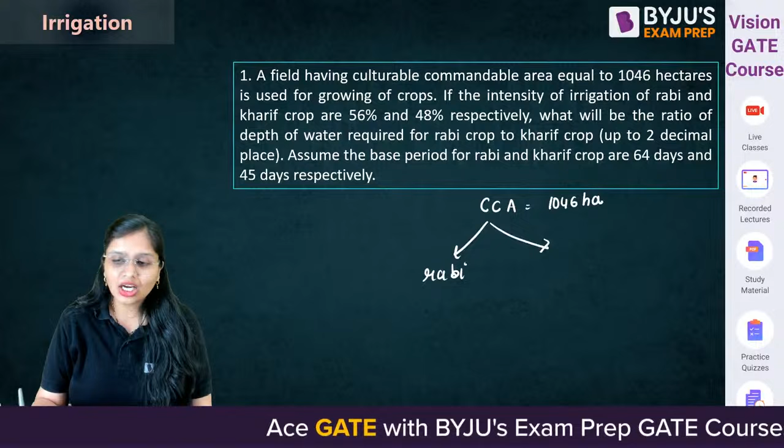A field having culturable command area equal to 1046 hectares is used for growing crops. If the intensity of irrigation for Rabi and Kharif crop is given, intensity for Rabi crop, like wheat, is 56%, and intensity for Kharif crop, like rice, is 48%. What will be the ratio of depth of water required for Rabi crop to that required for Kharif crop?

We already know delta equals 8.64 B by D. The 8.64 gets cancelled out, so basically it's the base period of Rabi crop and base period of Kharif crop, dividing by duty. But check it out, in the question duty is not mentioned. We know discharge equals area by duty, so from here duty will come out to area by discharge. So how will you calculate? First, let's calculate area.

Area for Rabi crop will be 0.56 into 1046, and area for Kharif will be 0.48 into 1046. How much does it come out to? This comes out to 585.76 hectares, and this comes out to 502.08 hectares. Okay, this is the area which is coming out.

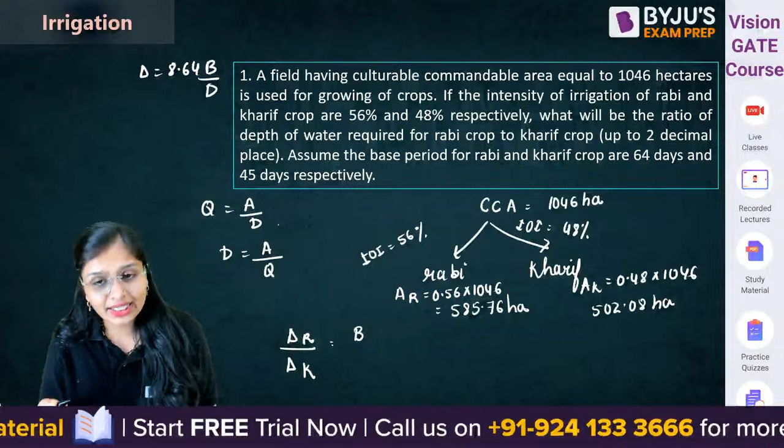Now, what I need to calculate is the ratio of depth of water, technically I need to calculate delta. So if I talk about delta, base period, have they told that the base period is different anywhere? Yes, base period for Rabi crop is given as 64 days, and base period for Kharif crop is given as 45 days. How will you do it?

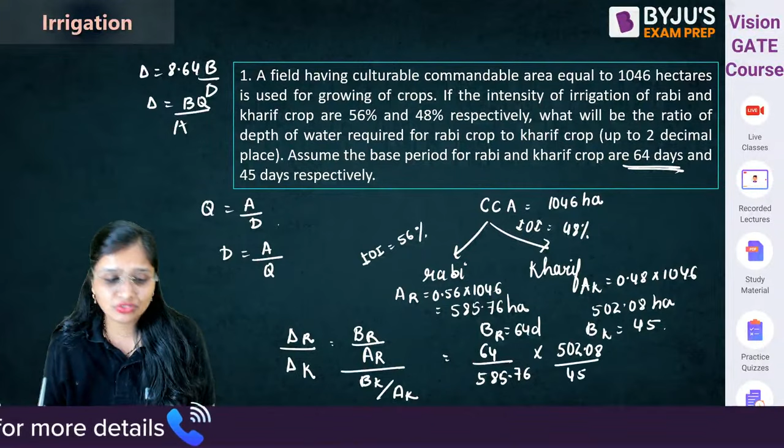Delta equals B into Q by A. Discharge is the same, so only base period of Rabi crop divided by area of Rabi crop, and base period of Kharif crop divided by area of Kharif crop. That's it, you will get the answer. Base period of Rabi crop is 64, area is 585.76. Area of Kharif is 502.08 and base period of Kharif is 45. Now guys, solve it, you will get the answer. Solve it quickly guys.

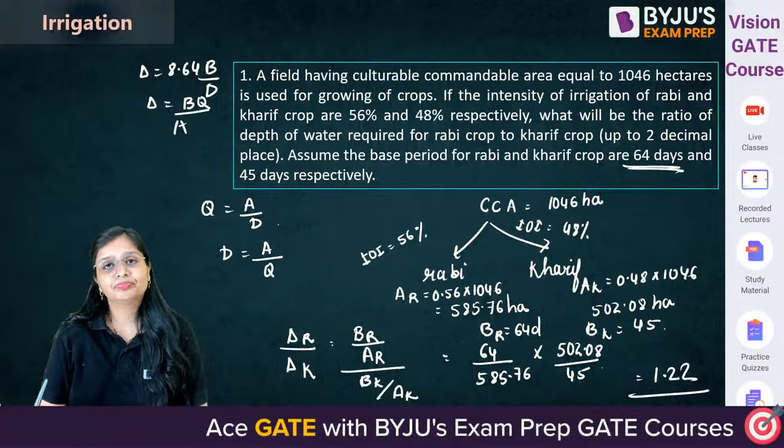Solve it quickly, you will get the answer as 1.22. Okay, so such pattern of questions can be asked in the examination.

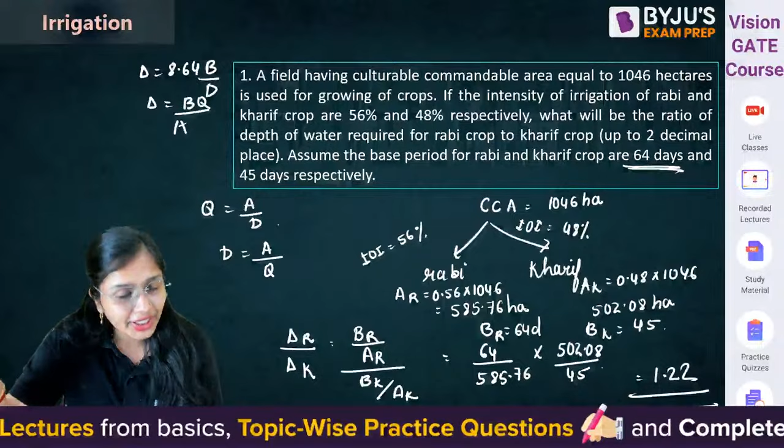See, in this the delta formula is used, intensity of irrigation formula is also used, discharge equals area by duty is also used. So in one question, all the concepts have been used.

Okay, now moving to the next question. This is a good question, simple, but I'll solve it. A distributary canal carrying discharge of 0.24 meter cube per second is used to irrigate 464 hectares of land for 8 hours. If the discharge reaching the field is 0.20 meter cube per second, and runoff losses is 375 meter cube, what is conveyance efficiency and what is application efficiency?

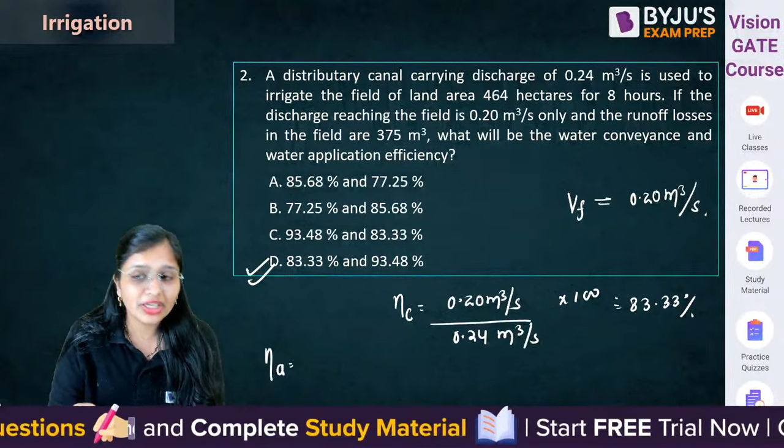According to the options you don't need to calculate the application efficiency, but still we'll calculate. Water application efficiency is water stored in the root zone of the crop divided by water delivered into the field. How much water is delivered into the field? 0.20 meter cube per second.

If 0.20 meter cube is going in one second, so in 8 hours how much will go? 8 hours, 1 hour is equal to 60 minutes into 60 seconds. So this will come out to be 5760 meter cube. This much amount of water will be applied to the field.

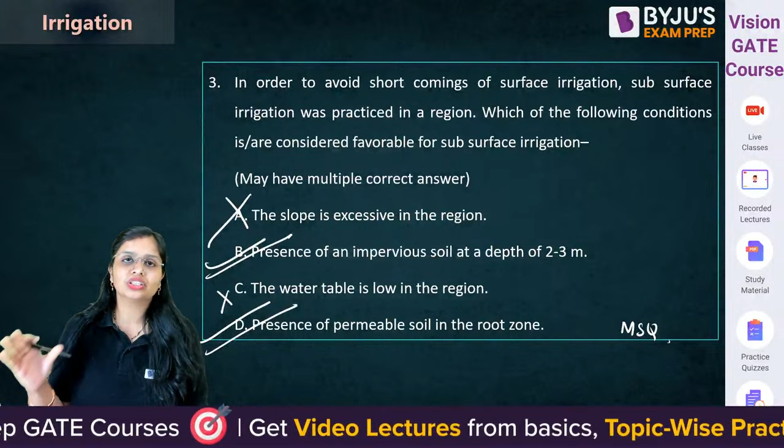Generally, maximum times in any GATE questions, ESE, state level, they ask about sprinkler irrigation. But till now they haven't asked for subsurface irrigation, that's why I have taken the question for subsurface irrigation.

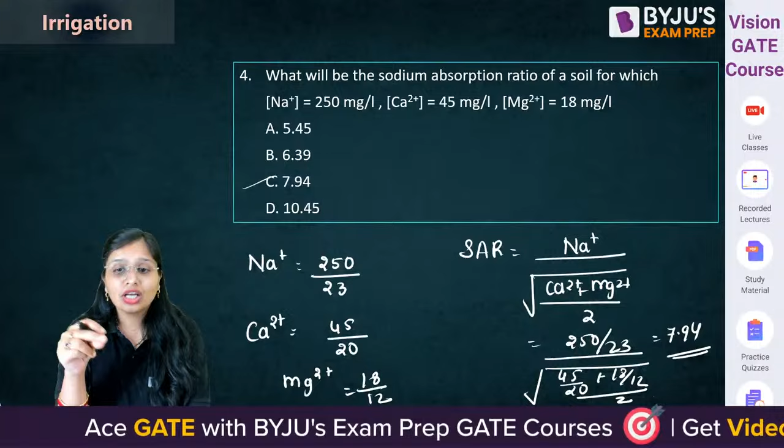In the question, if they want to trick it or make it even a 1 mark question, they will not give you the answer for sodium adsorption ratio. They will say low sodium water, medium sodium water, high sodium water, very high sodium water. So it's very important that you remember the range.

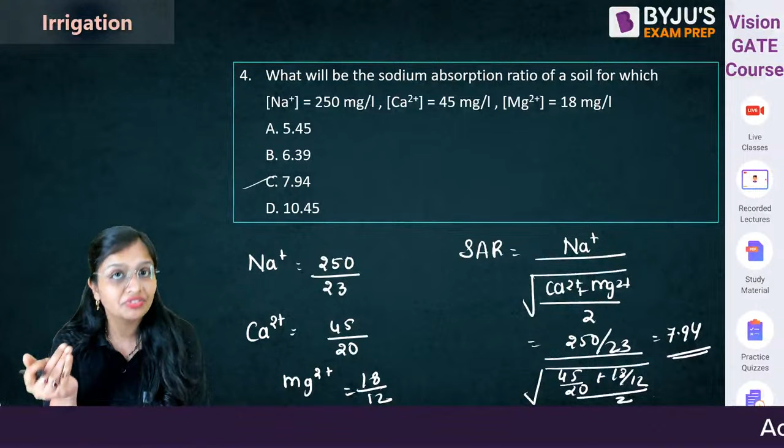A sandy loam whose water holding capacity is given. Area irrigated, depth of root zone, everything is given. It is asking for the frequency of irrigation and field irrigation requirement (FIR). This is an MCQ question for 2 marks. Whenever such questions come, guys, this is a good question.

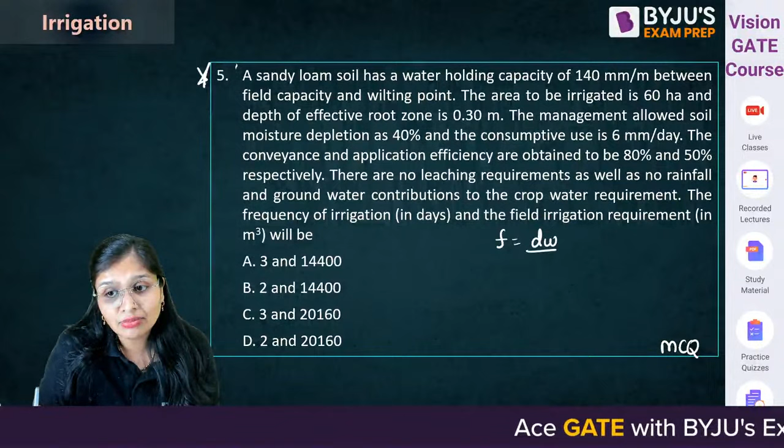Frequency of irrigation is DW by CU. Consumptive use is given in the question as 6 mm per day. Now how much water is stored in the root zone of the crop?

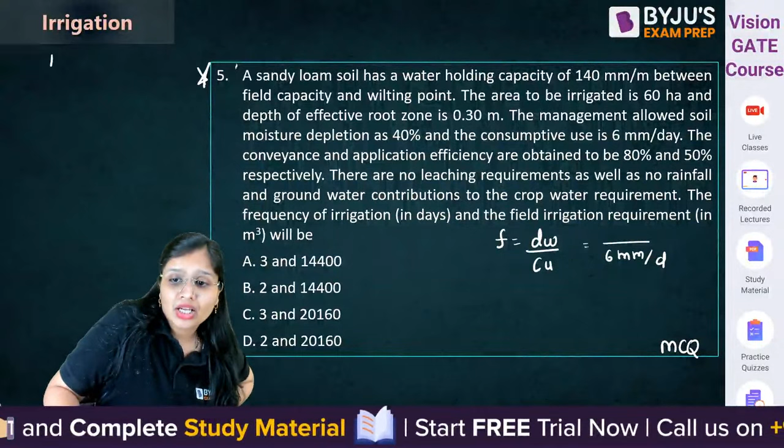Check it out. In 1 meter, 140 mm is stored. So how much is the depth of the root zone given? 0.3 meter. If in 1 meter 140 mm of water is stored, then how much will be stored in 0.3 meter? So 140 mm... for 0.3 meter how much will come out? This comes out to 42 mm of water stored.

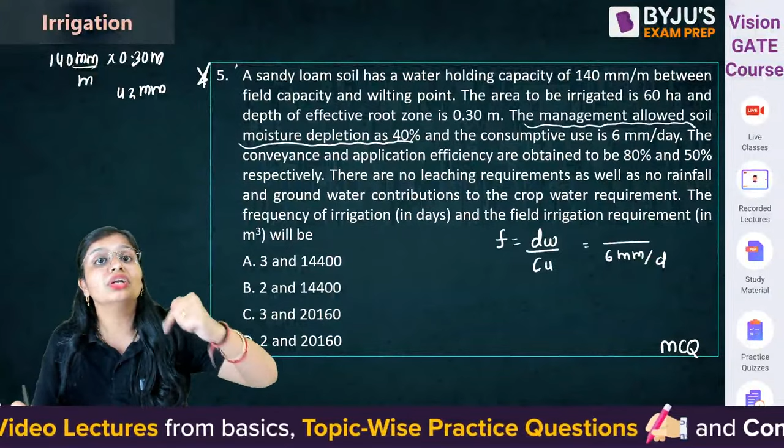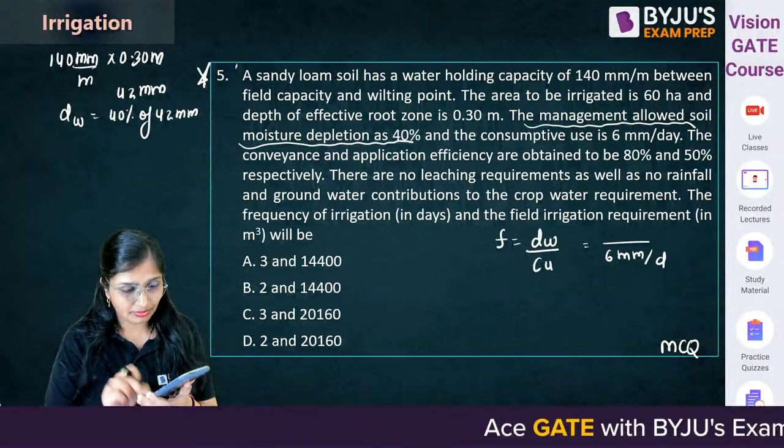So here your DW will become 40% of 42 mm. How much will come out, guys? 40% of 42 mm - solve it. This comes to 16.8 mm. So from here, 16.8 mm - now calculate it. 16.8 divided by 6, this will come to 2.8 days.

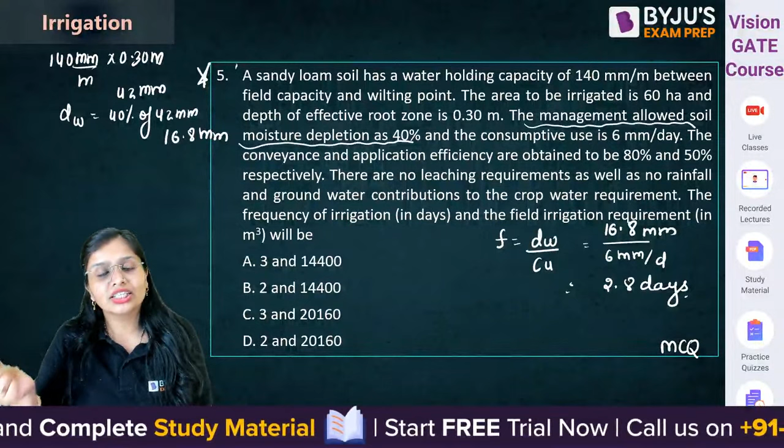Frequency of irrigation will be rounded off to the lower side, because if you take 2.8 as 3, there are chances it will reach the permanent wilting point. So either B or D will be correct. Now we have to calculate field irrigation requirement.

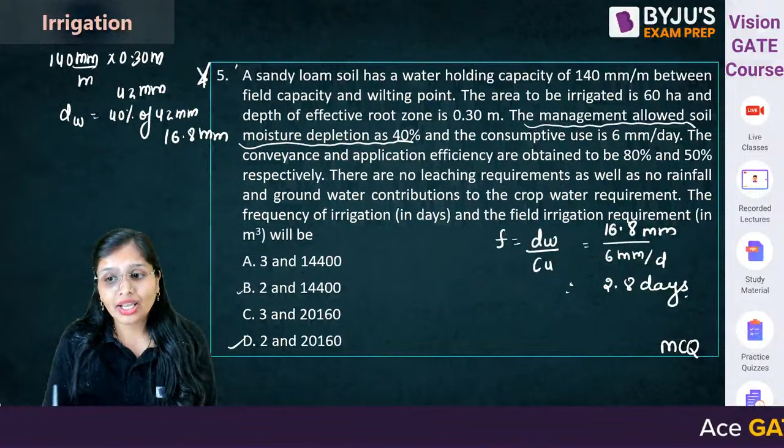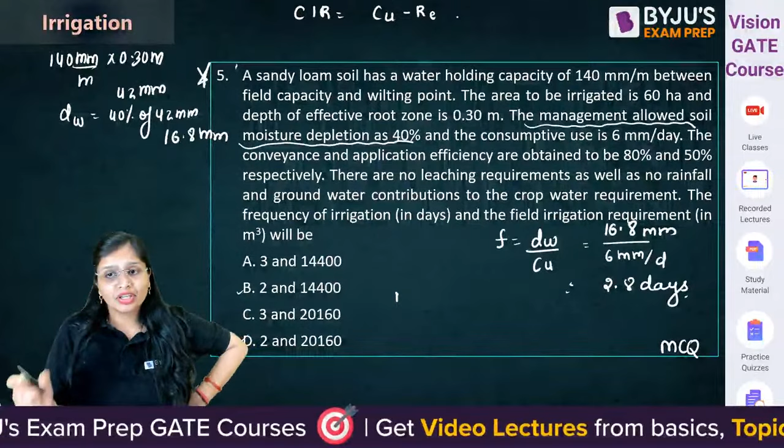For calculating field irrigation requirement, what do we need to know, guys? Field irrigation requirement - keep in mind, consumptive irrigation requirement is CU minus RE. Consumptive use is given in the question. Net irrigation requirement is consumptive irrigation requirement plus pre-sowing requirement plus leaching requirement. Nothing is given in the question, leaching requirement is nothing given. Field irrigation requirement is net irrigation requirement divided by water application efficiency.

Now check it out. After every 2 days you need to water it. How much amount do you need to water it, guys? If for 1 day evaporation and transpiration require 6 mm of water, then in 2 days how much will they require? 6 mm they require for 1 day, so for 2 days how much water will be required? 12 mm. In the question it has asked us in terms of volume.

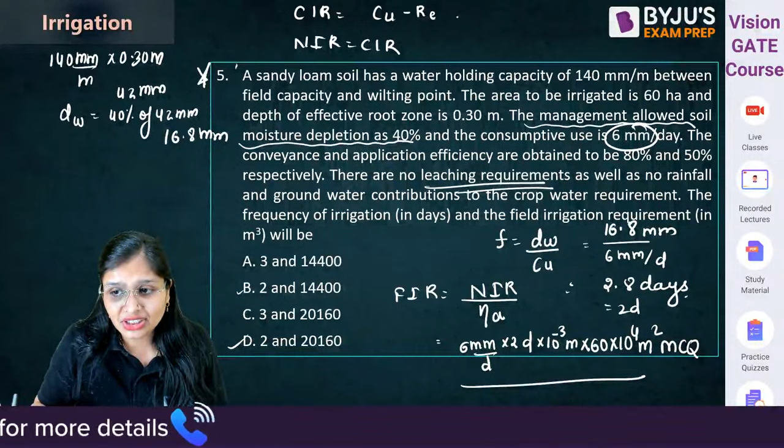So first convert mm into meter, 10 raised to power minus 3. Now multiply by area, 60 into 10 raised to power 4. Divide by water application efficiency, which is 50%. Solve it, you'll get the answer. How much are you getting? The question has asked for field irrigation requirement.

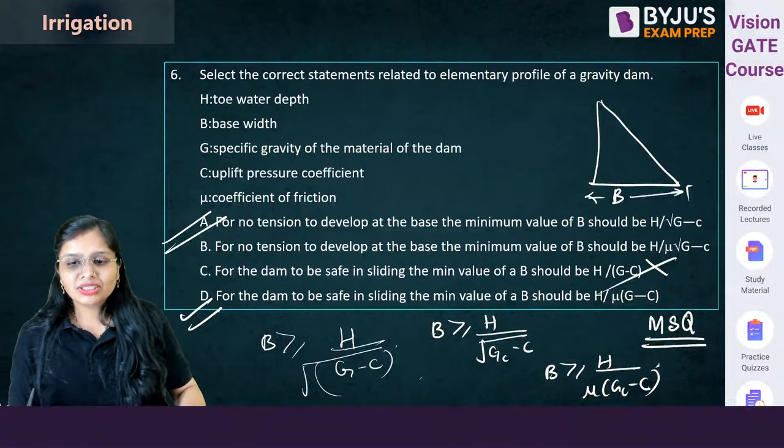Very very very simple question, guys. Sometimes you can't expect that simple questions will come, but they do come. The net uplift force on dam if height of water in the reservoir is 45 meter. Let us suppose the height of water in the reservoir is 45 meter and width of the dam is 21 meter.

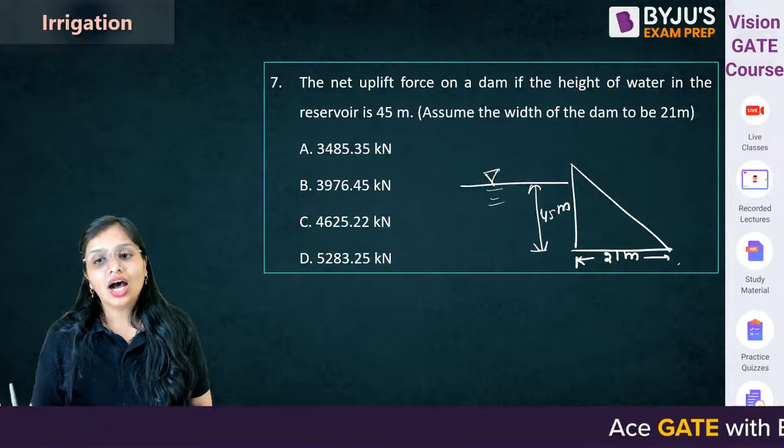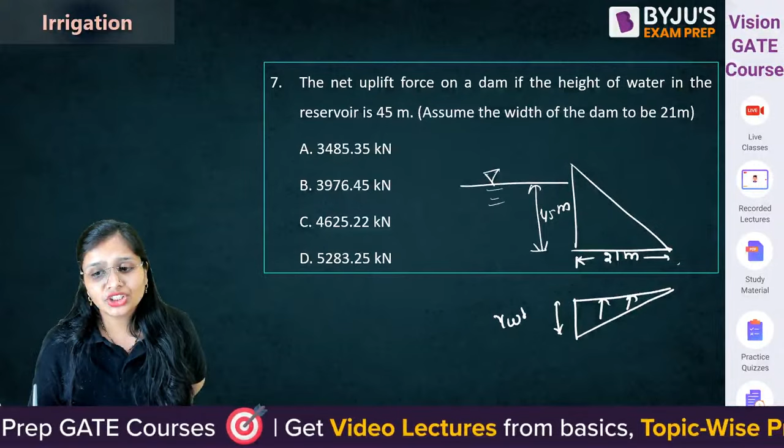So what will be the uplift force? Just calculate the area of this triangle. Here it becomes equal to gamma WH, so half base 21. This will be gamma W.

Let's take it as 9.81. Height will be 45, that's it. So from here you will get 4625.22 kilonewton. Such simple questions can also be asked.

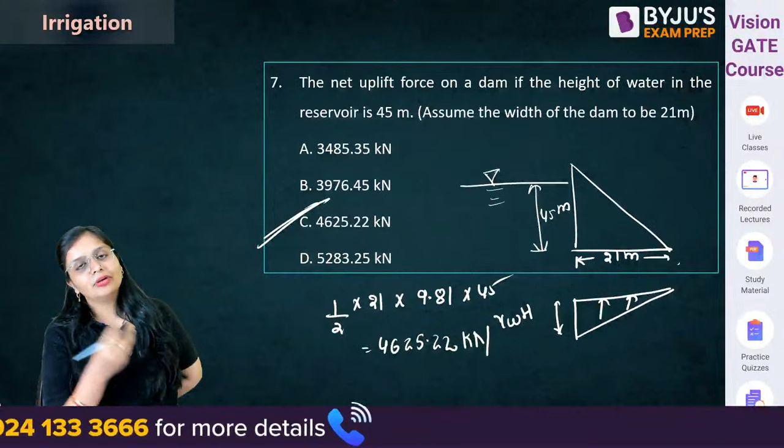Whenever you have the habit of solving tough questions, they can ask simple questions as well. Good question, this is an MCQ for 2 marks, because if they would have given only the options, it would have been 1 marks. But classification of the dam is also asked.

A concrete dam is there whose width is 14 meter, height is given to you as 17.45 meter. Now this dam you have constructed on a river. You have constructed this dam on a river to store water. Compressive strength is given, specific gravity is given to you.

What will be the critical height of the dam? Come on guys, there is a formula. Critical height, or you call it by one more name, limiting height of the dam. Formula is F upon gamma W, G minus C plus 1. This is the formula.

Compressive strength they have given to you as 2896. Gamma W we will take as 9.81. Specific gravity they have given us as 2.24. Uplift we are assuming full reservoir level, so 0, it will be 0 plus 1. Solve it, you will get the limiting height of the dam, or you call it critical height.

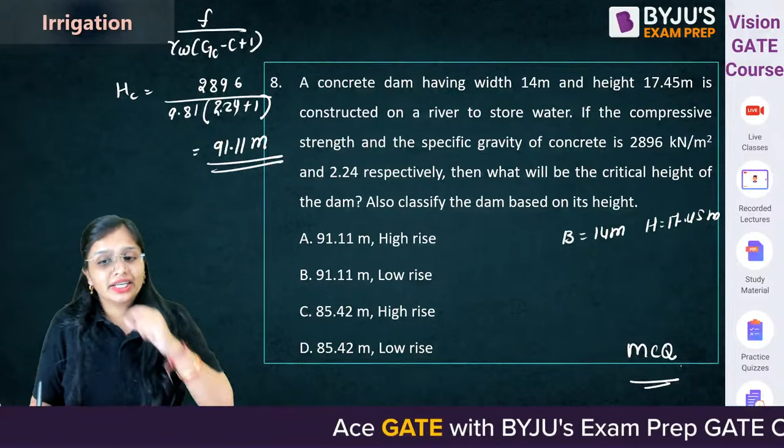How much will it come, guys? What will the critical height be? When you solve it, it will come 91.11 meter. This will be the critical height. Now A can also be the answer, B can also be the answer. How could you know which one is correct?

The given height is 17.45 and the critical height which you are getting is 91.11 meter. So is the height you are getting really 91? Just check it out once. 91.11 meter is coming.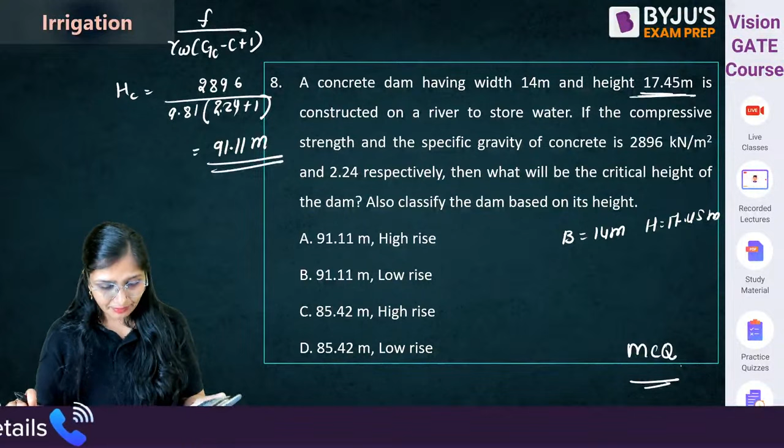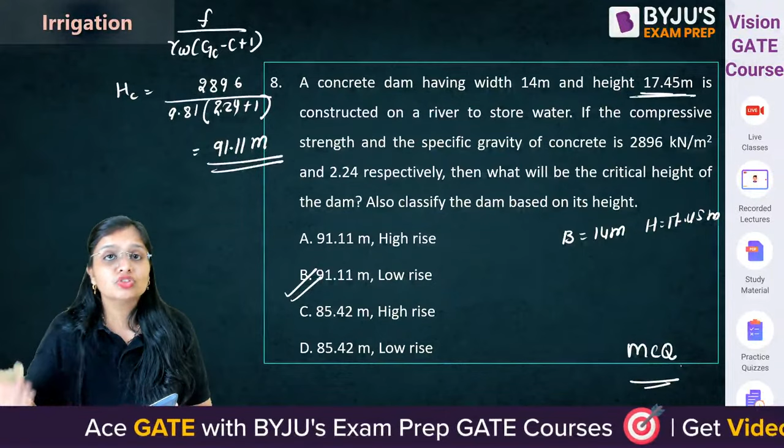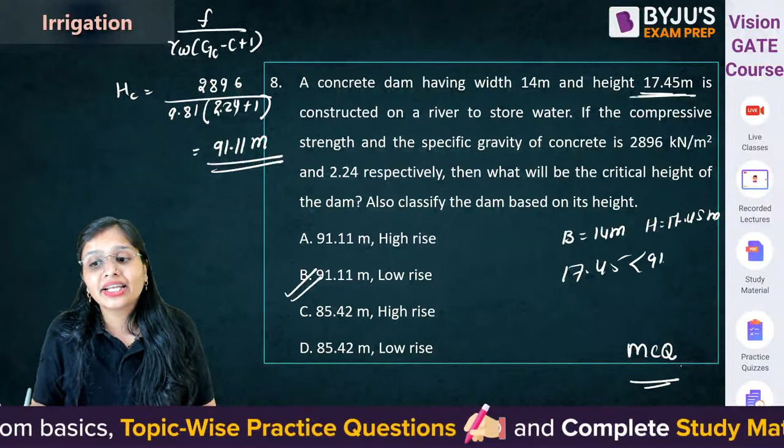So the height you are getting of the dam is less than the critical height, so you will call it low rise. If it were the opposite, suppose the height were 100 meter, then if the given height comes out to be more than critical height, it will be high rise. But since now the given height 17.45 meter is less than critical, you will call it low rise.

Next, a channel is designed by Lacey's theory. Velocity is given to you as 1 meter per second and silt factor is 1. Now you have to tell the hydraulic mean radius. It's very simple, directly use the formula. Use it, this is also 1, this is also 1, you will get 2.5 meter. Simple.

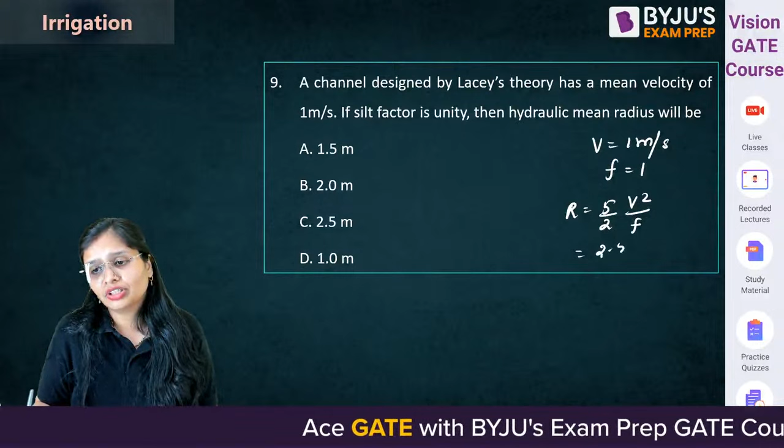1 marks. A wide unlined channel carrying silt-free water, no silt is there, has a depth of 2.5 meter. The slope is given to you as 1 in 10,000. The maximum permissible stress on the bed to prevent scour.

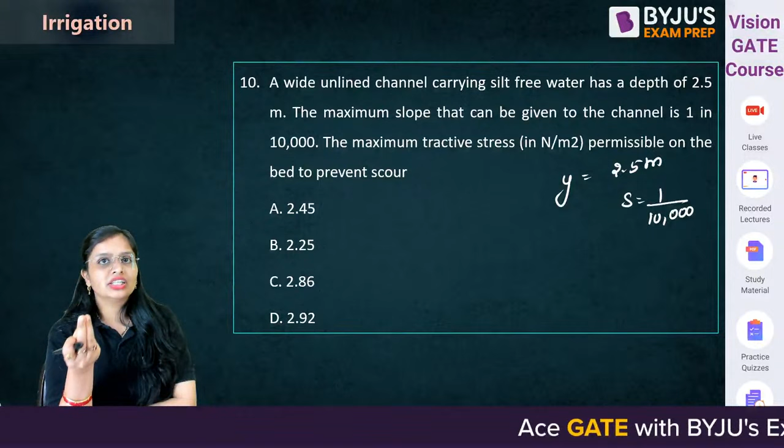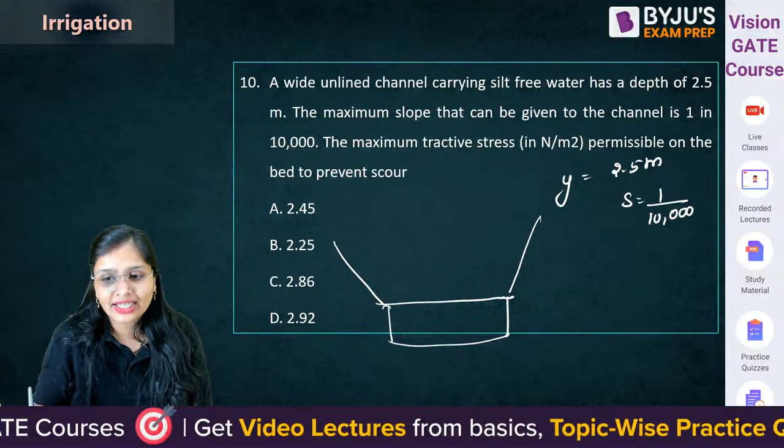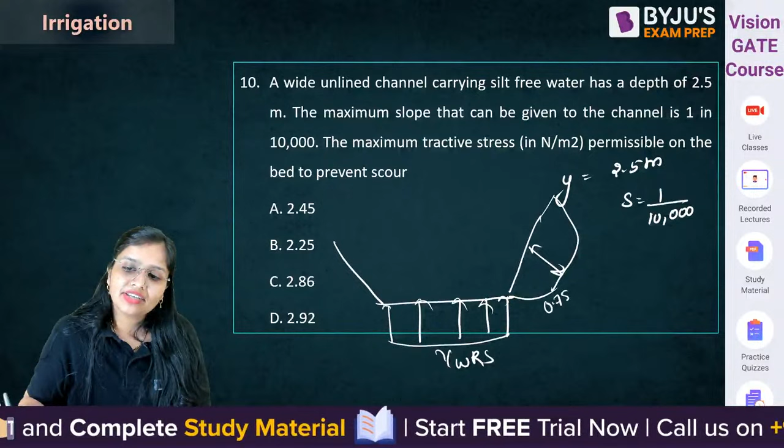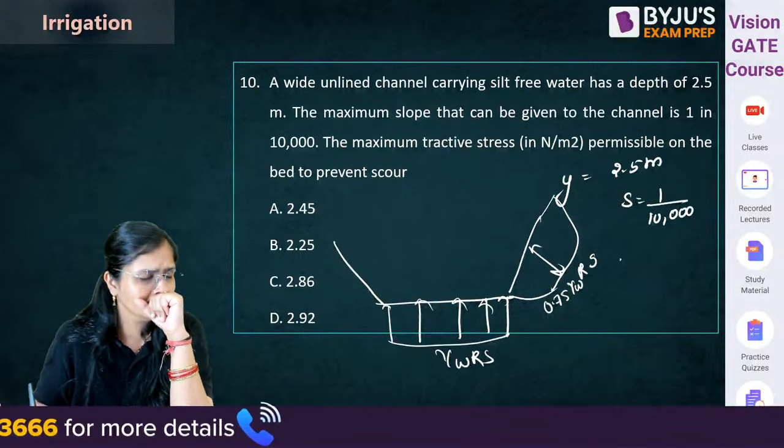In this question, generally they should specify whether it is a rectangular channel or a trapezoidal channel. However, for wide rectangular channel or for trapezoidal channel, in both cases, for the bed, the tractive stress is gamma WRS. Like if it is a trapezoidal channel also, for the sides in the trapezoidal channel it is 0.75 gamma WRS. It has asked for the bed. However, it should specify whether it is a very wide rectangular channel or trapezoidal channel. For that condition only gamma WRS is valid.

Gamma WRS, I'm taking it as a very wide rectangular channel, benefit of doubt. Gamma W is 9.81. R for very wide rectangular channel is equal to what?

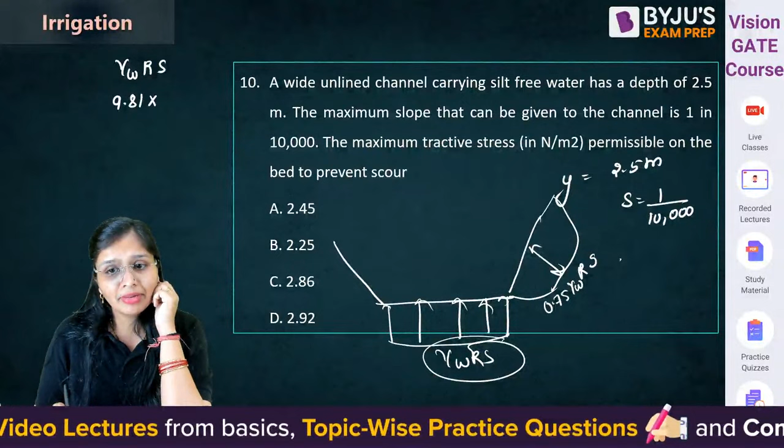Y by 2 - I could have taken that. Is it? For a rectangular channel, if it were efficient, then it would be y by 2.

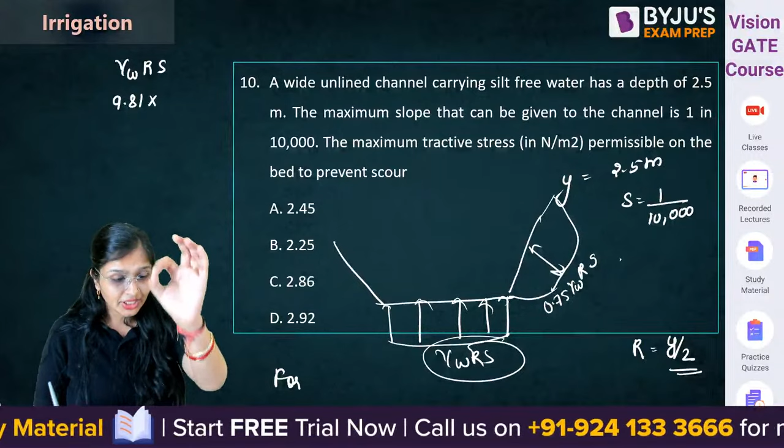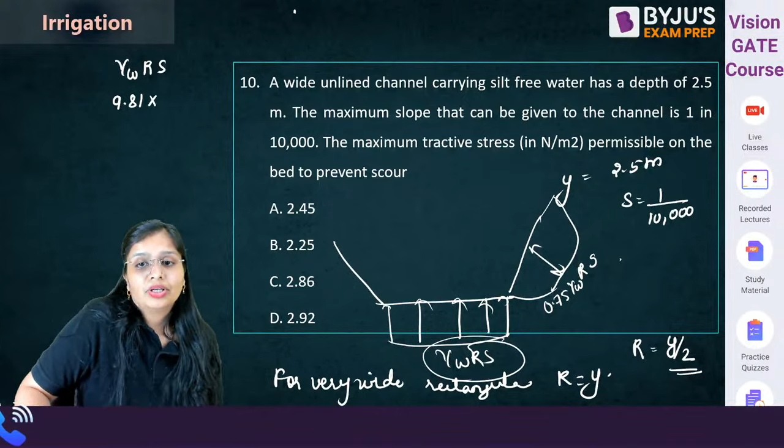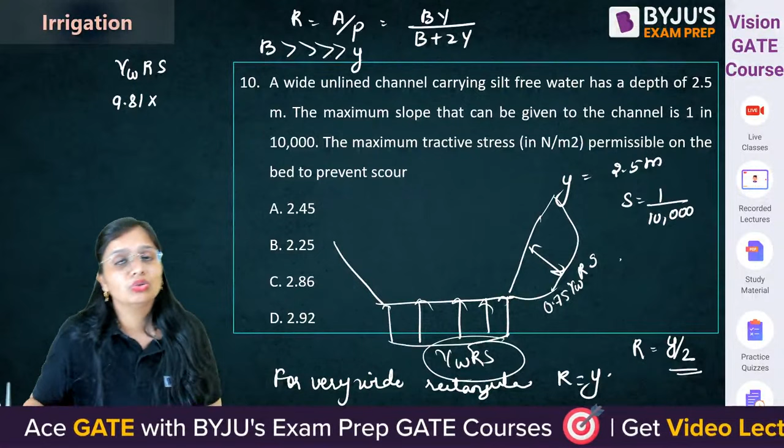But for a very wide rectangular channel, here students make a mistake. For a very wide rectangular channel, keep in mind, R is equal to y. Why? Because hydraulic radius is wetted area by wetted perimeter. Area is b times y, perimeter is b plus 2y. Since width is multiple times more as compared to the depth of flow, you take this approximately as width only. So this will be y.

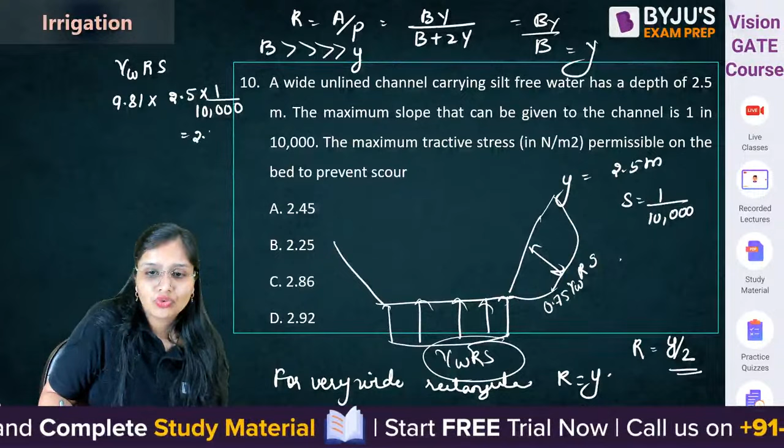Depth is given as 2.5 and slope is 1 by 10,000. How much will it come? It will come to 2.45 Newton per meter square.

Answer. Okay, next question. So you have been given a permeable foundation and asked to calculate exit gradient. Very simple: H by D into 1 upon pi root lambda.

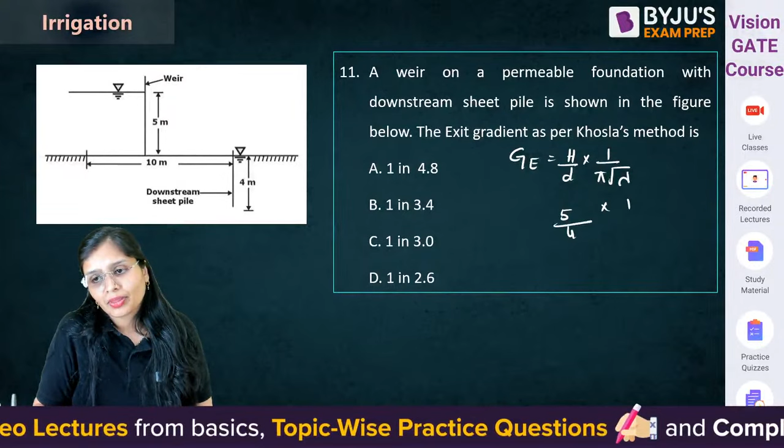H is how much? H is 5 meter height. Depth of downstream pile is how much? 4. We must calculate lambda. Lambda is 1 plus root over 1 plus alpha square, by 2.

Alpha is B by D. Width is 10 meter, and depth of the downstream pile is 4. So 10 by 4 is 2.5, right? 2.5. So 1 plus root over 1 plus 2.5 square, by 2. How much will it come?

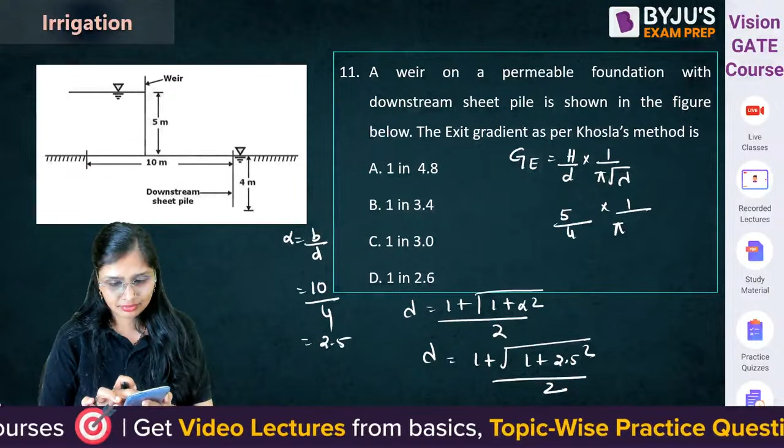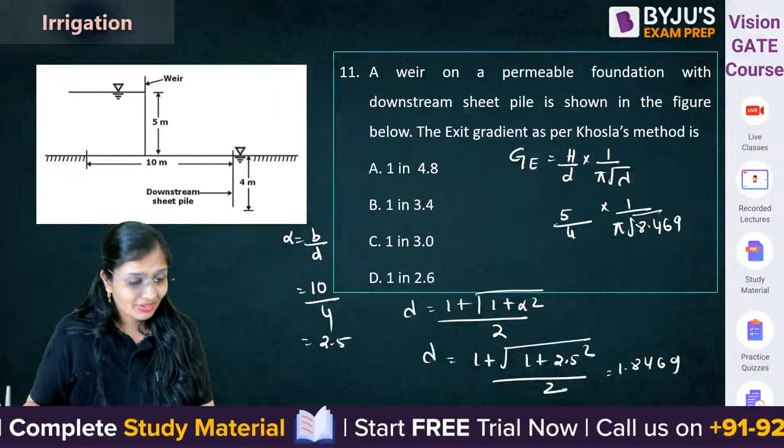This will come out to be 1.8469. Substitute it, that's it. But one thing you have to do - when you solve this, you will get it as 0.29.

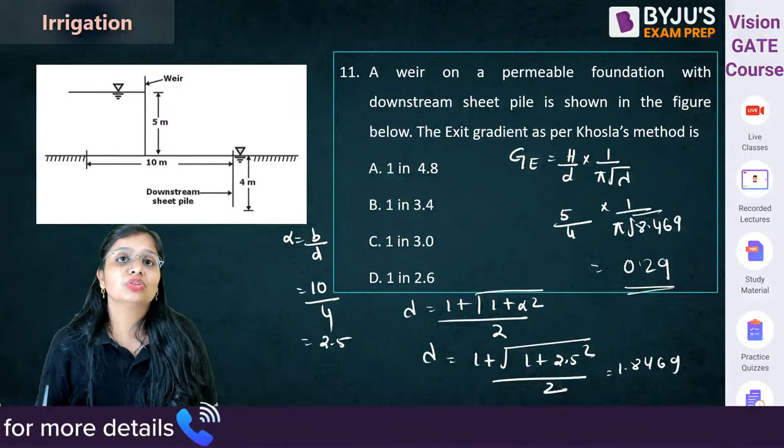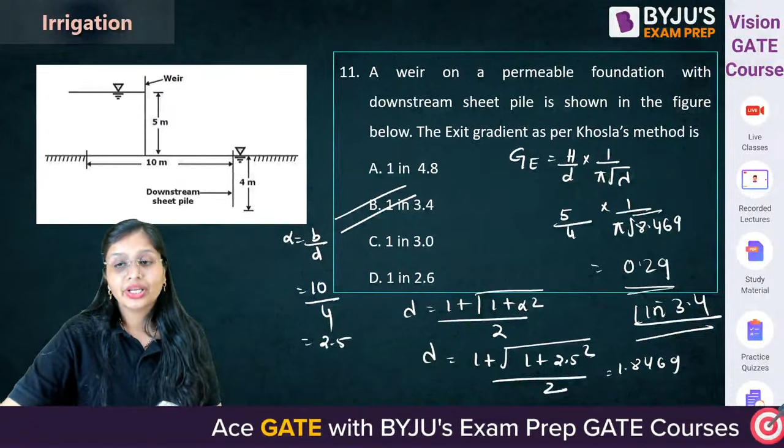So you have to inverse it, because the question hasn't asked directly in terms of decimals - they have asked in terms of slope, 1 in something. So when you inverse it, you will get 1 in 3.4. The inverse button you have in your calculator - do it, 1 in 3.4. If you ask how to do it on a virtual calculator, just do 1 upon 0.29.

So this is again a good question. A loam soil is there whose field capacity is given as 30%. Permanent wilting point is given as 15%. Gamma D is given as 1.5 gram per cc.

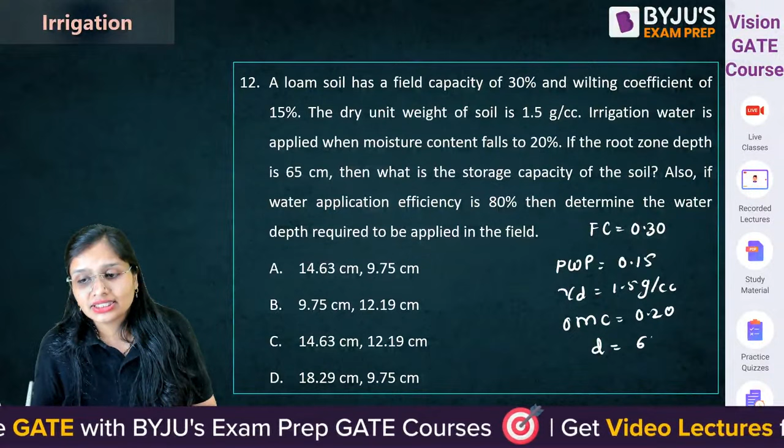And irrigation water is applied when moisture content falls below - nothing specific is given, that means optimum moisture content is 20%. Okay? If the root zone depth is 65 centimeter, what is the storage capacity of soil?

Technically, it is asking you how much water is stored in the root zone of the crop - means it's asking you for DW. Okay, so first calculate DW. DW will be gamma D into D, by gamma W, into field capacity minus optimum moisture content.

Gamma D is 1.5, gamma W will be 1. D will be 65 centimeter, into 0.30 minus 0.20. How much will it come? 1.5 - guys, you also solved it, you're just waiting for me only to solve every question. It comes to 9.75 centimeter. This is the storage capacity of the soil.

Okay, now according to us, B will be the answer. Now check it out, one more thing they're asking: determine the water required in the field. See, 9.75 centimeter is the water that will be stored in the root zone.

But we need to apply more amount of water. Why? Because when you supply water to the field, run off losses will happen. So if you supply 9.75, that 9.75 will not be stored in the root zone - it will not be stored in the root zone, because losses like runoff will be there. So you need to supply more amount of water.

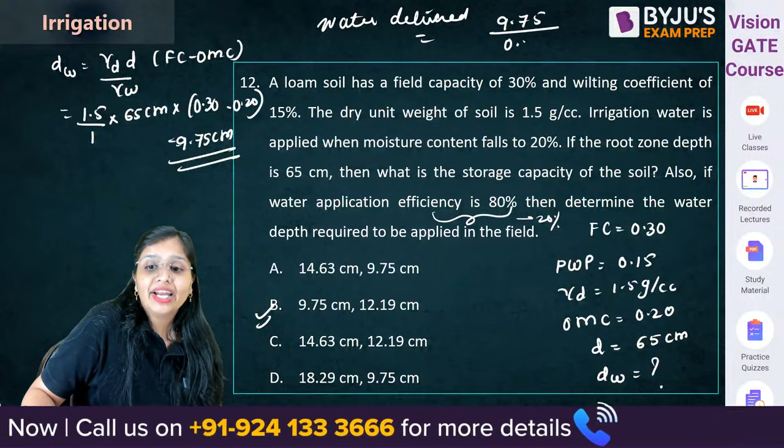How much more? Because check it out, application efficiency is 80%, so 20% loss has happened. That means you have to supply more than 9.75. So the water to be delivered into the field, or water applied in the field, will be 9.75 divided by 0.80, which comes out to be 12.19 centimeter. Okay, so B will be the correct answer.

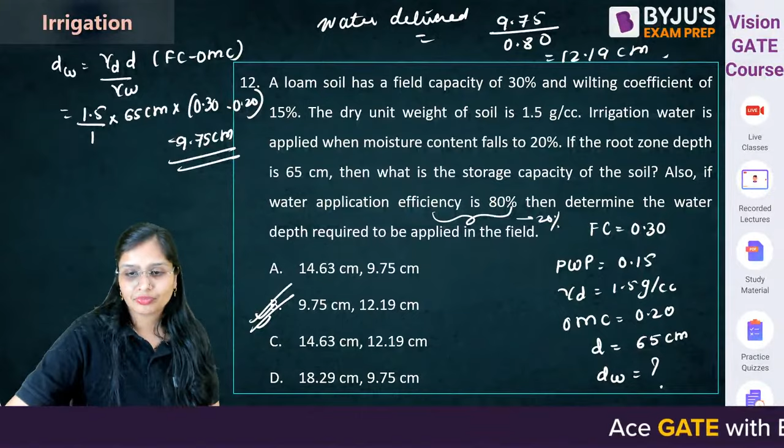Fine, so now this question - simple, only you should know one thing for this question. A canal irrigates a culturable command area, sugarcane is there and wheat is there. This can be asked for 1 mark - okay so I have taken 1 mark, 2 marks, MCQs, NAT, MSQ.

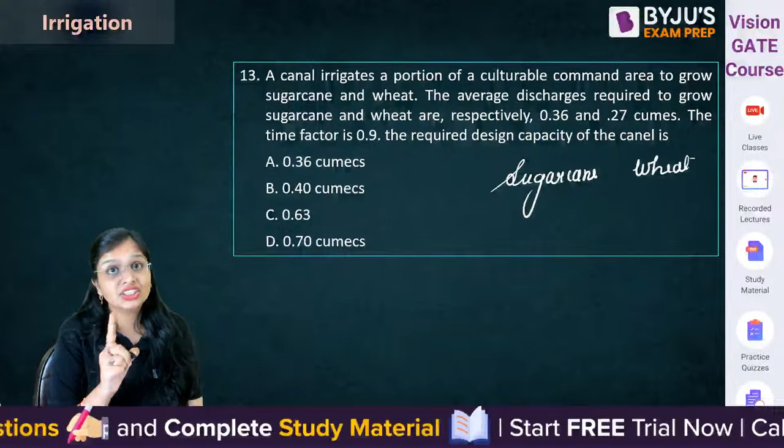Sugarcane, wheat is there, discharge is given to you. Average discharge is given in the question, keep that in mind. Average discharge is 0.36 cumec for sugarcane and for wheat it is 0.27 cumec. Time factor is given to you.

It is asking you design capacity. Sugarcane is a perennial crop, wheat is a rabi crop, so we need to add both of them - that is 0.36 plus 0.27. This is the average discharge.

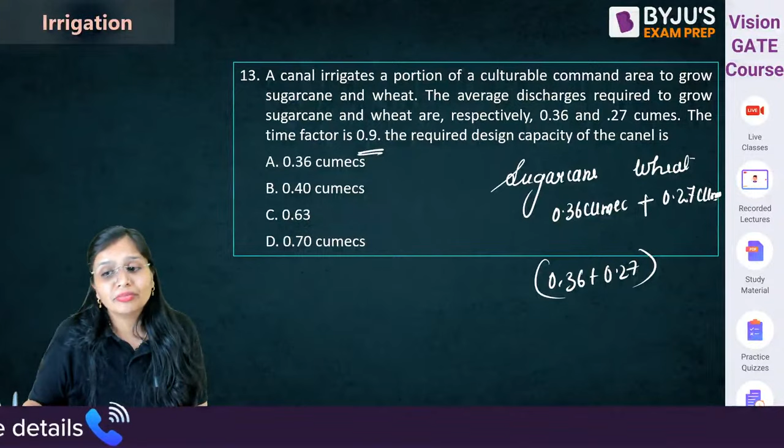Time factor is number of days canal actually runs divided by the number of days of irrigation period. If a crop takes 4 months, we don't run the canal for 4 months - we don't run it for 120 days, we run it for 80 days, 50 days. So technically, if we run the canal for fewer days, we need to supply more amount of water - so more water means you have to divide by 0.9. How much will it come when you solve it?

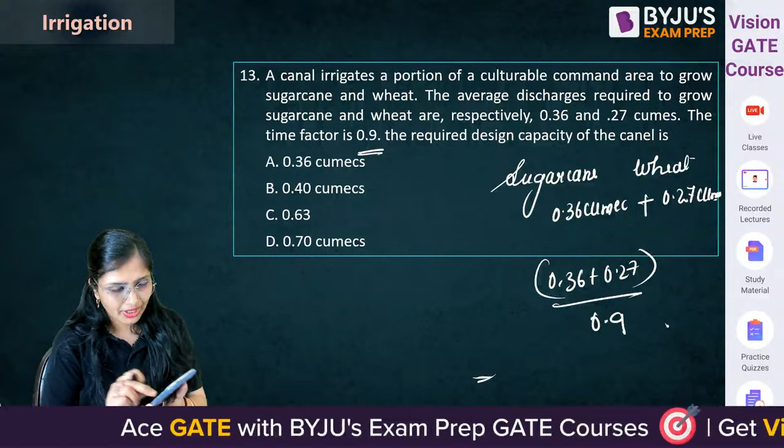0.36 plus 0.27 divided by 0.9. This comes out to be 0.7. So 0.7 cumecs will be the design capacity of the canal.